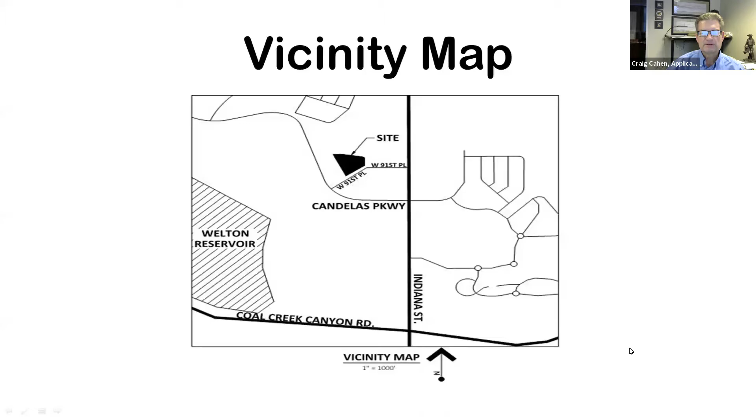If we can go to the vicinity map, there you go. That's basically where the site is for reference. Probably the next page will be even better.

The site is bordered in green. The dashed red line shows the approximate location of the proposed replat line between the 2 lots. To the north of the site is a detention area, to the west is the daycare facility, which is to the upper left of our site. Again, King Soopers is to the lower right. A detention pond exists for the King Soopers development directly across West 91st Place from us. There is the existing Kendrick Street along the west property, as well as an existing curb cut directly opposite the rear curb cut leading into the King Soopers development.

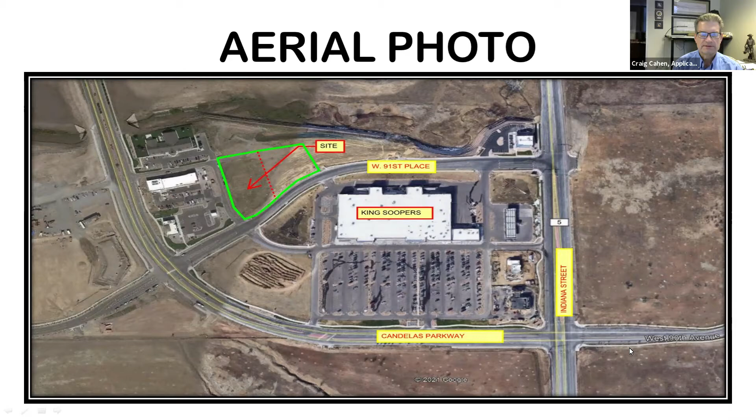Next slide, please. This is the proposed lot configuration of the entire 2.75 plus or minus acres. Up in the upper left corner of lot 1, you see the existing easement, which is the replat of the existing access easement to provide access into that detention pond I mentioned to the north of the site. Again, its sole purpose in vacating the easement and replatting is to align it with the proposed roadway that we have within our site plan.

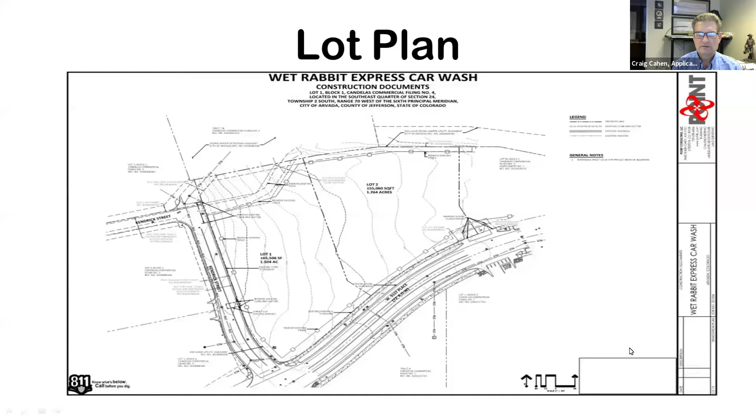Next slide, please. This is the proposed site plan indicating the car wash building with one curb cut onto Kendrick Street and the other utilizing the existing curb cut on West 91st Place. Connecting these two entry points will be a new ring road constructed in and around the development, essentially bifurcating the lots between our lots 1 and 2, and the lot owned by, I believe, the Candelas Corporation to the east.

At this particular time, we are only developing the western lot, lot 1, for the car wash project. We are going to replat into lot 2, but there are no plans in the works right now in any way, shape, or form. It will simply be future development as those opportunities present themselves.

The cars will access the site, approach the northern end of the building, go down along the west side along Kendrick for stacking purposes, go through the pay kiosks, swing around at a 180-degree turn, and then enter the tunnel on the south end of the building, going through the tunnel and exiting on the north side.

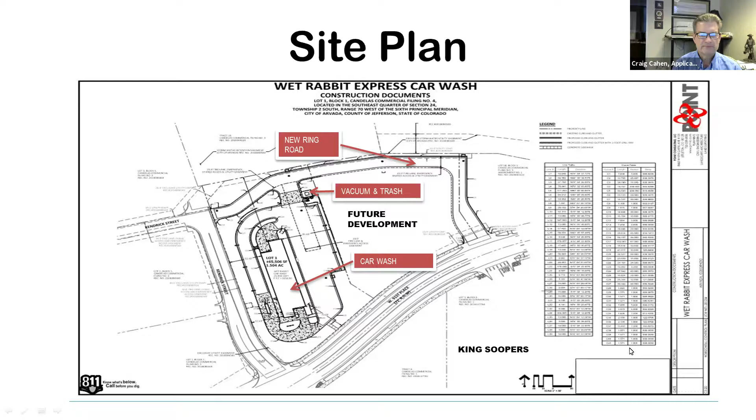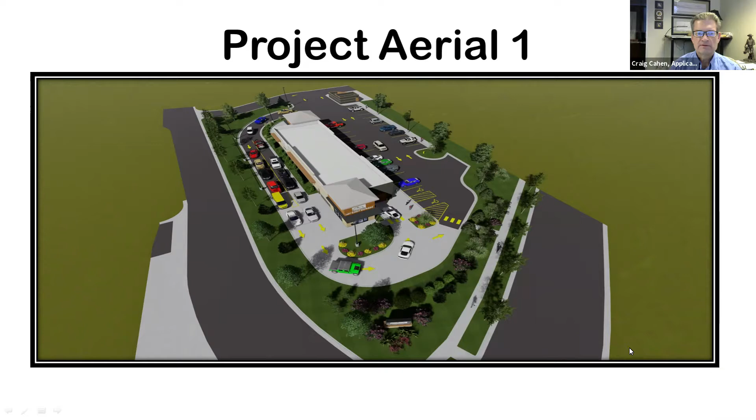Next slide. This is an aerial, giving you the whole overlook. We're looking from the corner of West 91st Place and Kendrick. The cars stack up along the west side, going through the pay kiosks, swinging around, accessing the tunnel entrance on the south side. The vacuum stations are in the paved areas on the east side of the car wash building. The trash enclosure and vacuum enclosure is the small structure at the very top of this slide.

Next slide. This is an aerial from the southeast corner looking directly at the tunnel entrance as the cars swing around, and a little better view of where the vacuum stations will be positioned in that parking area.

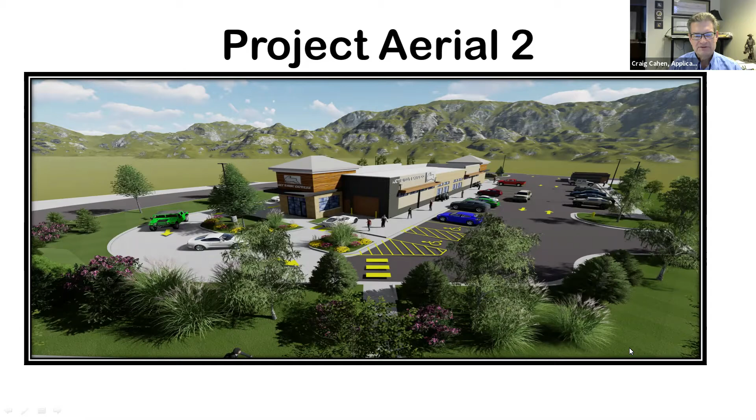Along the southern edge, separating the drive aisle entering the car wash, is going to be a rather heavily landscaped earthen berm, 3 to 4 feet tall, helping to block the visual access to the tunnel entrance. In this rendering, however, that tunnel entrance is actually a glass door, overhead sectional door, not a solid one as shown here. I caught that one very late in the game, so my apologies to everybody. It is incorrectly shown on the elevations, which you'll see in a minute.

Next slide please. Here are the elevations again. The southern elevation is on the upper left. The northern elevation, where the cars come out, is on the upper right. The east elevation is in the middle, and the west elevation along Kendrick is on the bottom.

You can see there is quite a juxtaposition of materials, colors, projections, parapet jumps and tower elements to effectively break up the massing of this building and give it some movement as you traverse along the property. This is not a single block of building in any way, shape, or form.

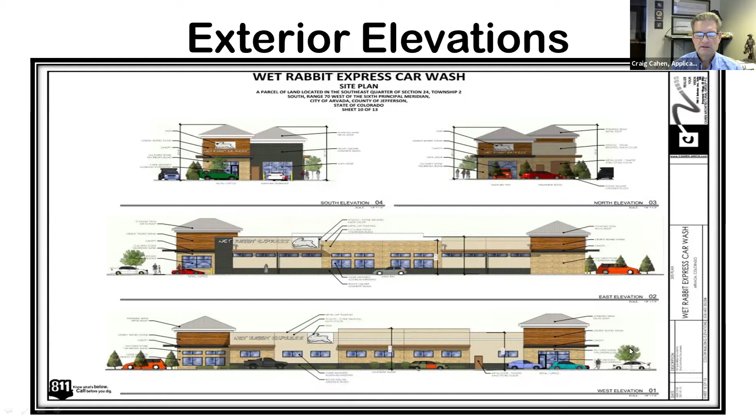Multiple kinds of fenestration. We want to bring a lot of natural light into the tunnel, as well as the office spaces and even the equipment room, where most of the cleaning equipment is housed. Next slide please.

The vacuum equipment could be positioned inside the building. However, it doesn't perform as well for our clients and guests. And noise in this particular development—as we are surrounded by our property to the east, a detention pond to the north and south, and Kendrick on the west, which is also being blocked by the car wash building itself—we feel that essentially noise will not be an issue. We're asking for the request to extend the walls to make sure of that. Again, the sole purpose is to have the vacuums work better, pure and simple.

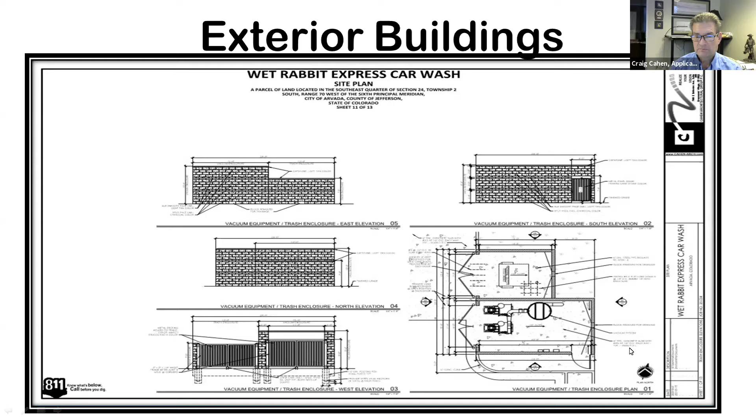Next slide please. This is a rendering from the corner of West 91st and Kendrick, showing the start of the berm behind a proposed sign, which will be under separate permit of course. Kendrick runs along towards the left, car wash building beyond, and the berm extends along West 91st Place.

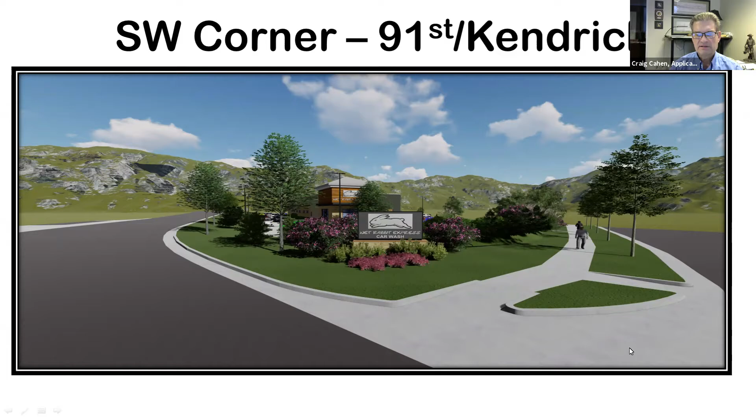Next slide please. This is at the Kendrick entrance looking to the southeast. That is the northern end of the building, showing the stacking lanes. The grade on Kendrick is actually about 4 feet higher than the building, so the cars are actually almost fully screened, but we will be looking down at the building and down at the cars queuing along Kendrick. Next slide.

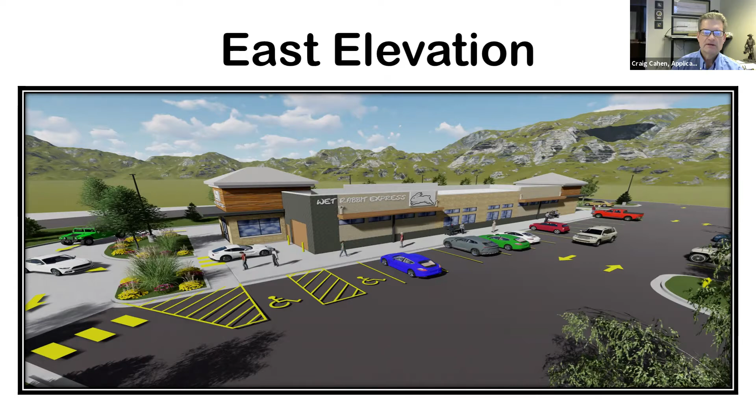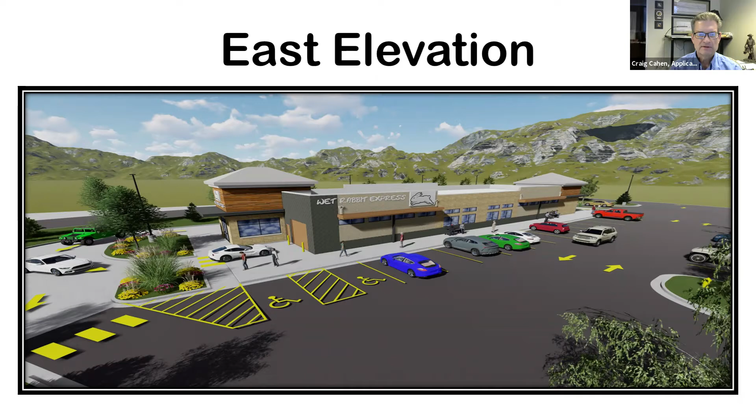This is a close-up of the building, showing the variety of materials and projections, both vertically and horizontally, and a close-up view of the entrance to the tunnel. The large windows on the east side bring natural light into the tunnel so it doesn't feel so much like a tunnel. The vacuum stations are where all the cars are headed and parked.

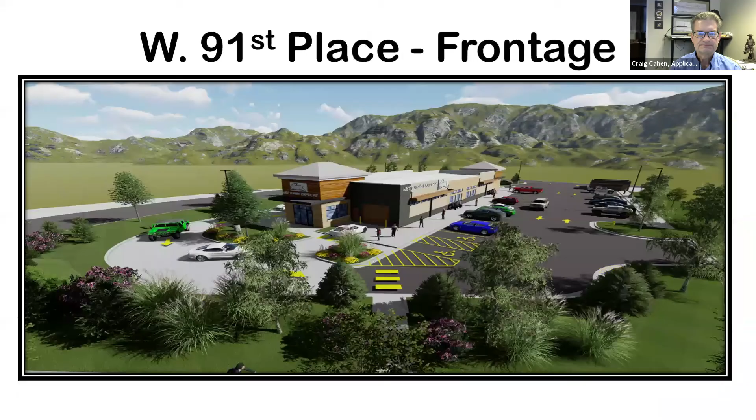This is an area with a closer view of the bermed area with the large plantings we've planned there to get a more 365-day screening effort of that door.

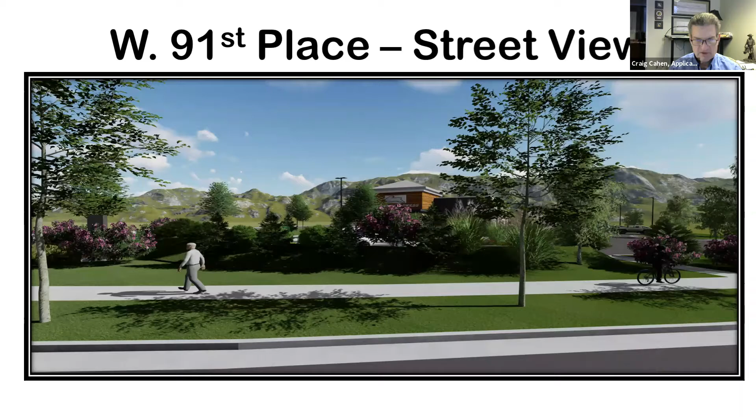This is an actual view from a car driving along West 91st Place. You see the berm in front, the landscape berm there, and the purpose of which is to get the plants up even higher to form that visual screen. As you can see, the entrance door to the tunnel is very difficult to see.

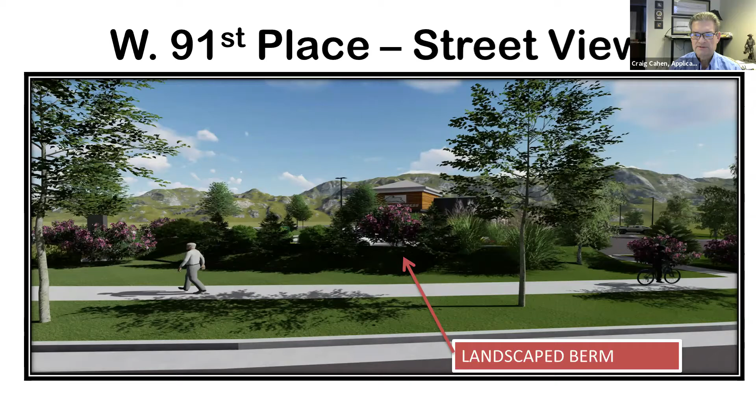Tunnel entrance. A little further back view east, again the berm does extend that far, and with the plantings, we feel that we have more than accomplished the screening of that tunnel entrance.

The reason for the request simply is we cannot position this building in any way, shape, or form that the tunnel entrances or exits will not face a street. If we were to locate the building east-west, it would show on Kendrick. We chose this orientation because it's a better use of the site since we're facing a major commercial area - actually the side of the King Soopers building, as well as their detention pond. We feel it more than meets the intent of the LDC in this case.

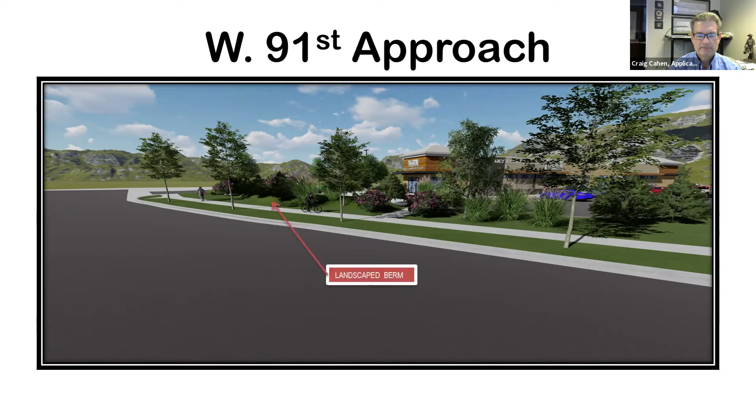Again, the landscape berm, right there.

So I guess that will basically bring us to the conclusion of our presentation. We look forward to receiving your comments and questions, and we will address those as they come up. All right, thank you very much.